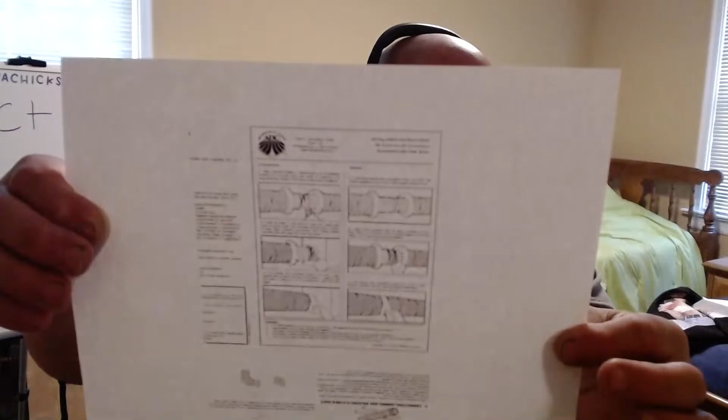I have seen videos of people talking about flex duct and how it's supposed to be installed, and I watched their videos and I'm just like, you got them half right, but not all the way right. So when you get a box of flex or a bag of flex or whatever, I know it's a little small print, but you see this little squared area right here? This comes with it, it's either printed on the box or it's on a piece of paper, and it tells you how to install flex.

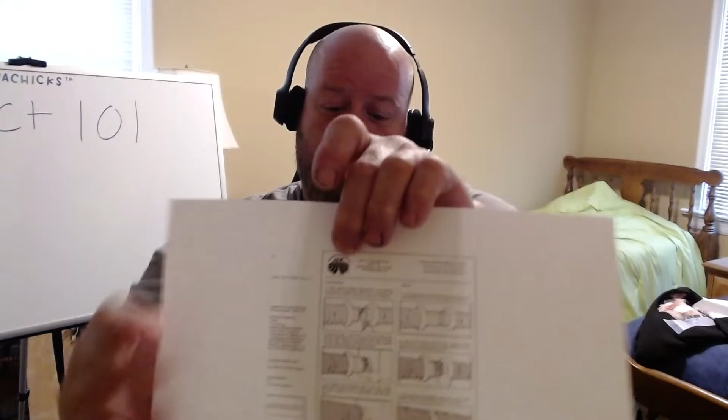Now, granted, this is a little small to read and we can't really read it that well, but I just wanted to show you. This comes with all flex. Now, you see this symbol right here? You see that symbol? That is the Air Diffusion Council. They manufacture, the manufacturers of flexible duct. This is who regulates that.

So on the Facebook page I posted a link, and that link is for this. It is for the Air Diffusion Council, manufacturers of flexible duct performance and installation standards, 5th edition. So we're going to go over this.

Everything about flex duct requirements, installation instructions, and how it's supposed to be done is regulated by this. Now, do people follow this? No, because they don't know about it. So that's what we're here for. We're going to teach you the Bible, and we're going to pull into the code sections of it and talk about it. So I'm going to reposition the camera, have it facing down so you can kind of see this, so I don't have to keep holding it up. You don't have to look at my beautiful face every day. So give me a second to reposition.

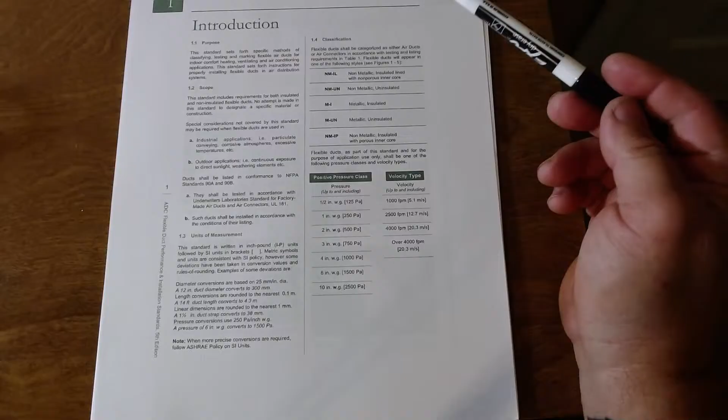Introduction. Purpose, measurements, classification. You have NM-IL, non-metallic insulated liner, non-porous inner core. NMUN, non-metallic uninsulated. M-I, metallic insulated, metallic uninsulated, and non-metallic insulated with porous inner core.

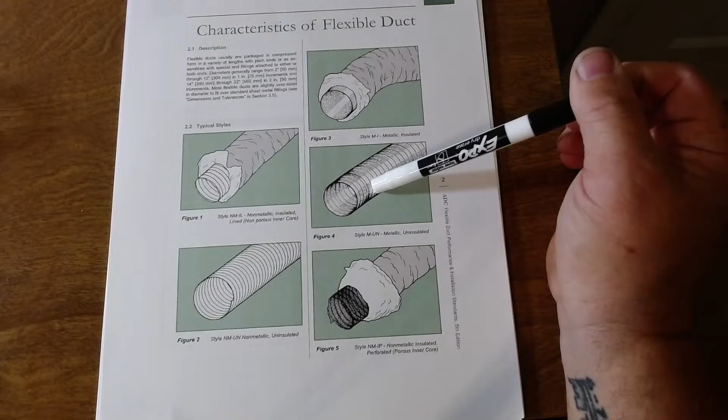Let's get to our characteristics. As you can see, this is your non-metallic insulated non-porous inner core. This is what we're talking about right here. We're not talking about the metallic insulated, we're not talking about the uninsulated, which is the air, the metal connectors.

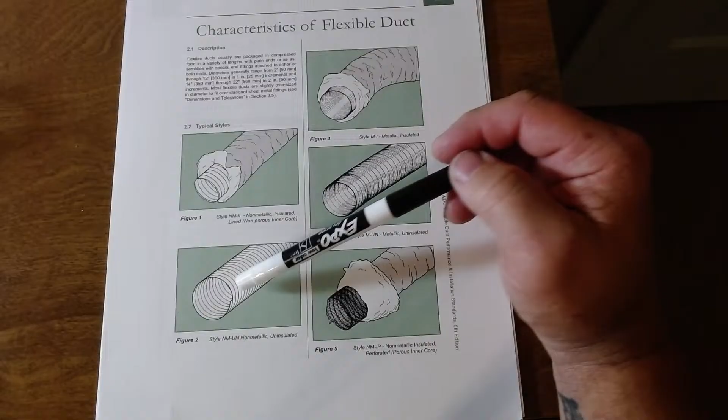We're not talking about the air connectors. Air connectors are uninsulated flex ducts, it's just the inner liner connection, or this lovely perforated porous liner. We're talking about this one right here, this is what everyone uses. Very rarely do we use the air connectors, which you can use in conditioned spaces, but this is what everyone was going with. This is what we're going to talk about.

Testing, listing, reporting, and certifying. So you can see it goes through that this stuff is tested and listed and certified. There's no 'oh, let's just do that.' Growth mold, air ducts, no. Air connectors, no. Hey, I got mold in my ductwork? Well, it says it's not supposed to be able to grow it right there.

So let me pull this over here and drop this down a little bit more so you can see that. There you go. So you can see, air ducts and air connectors. And now, here, right here, it collapsed. It has a footnote number 2.

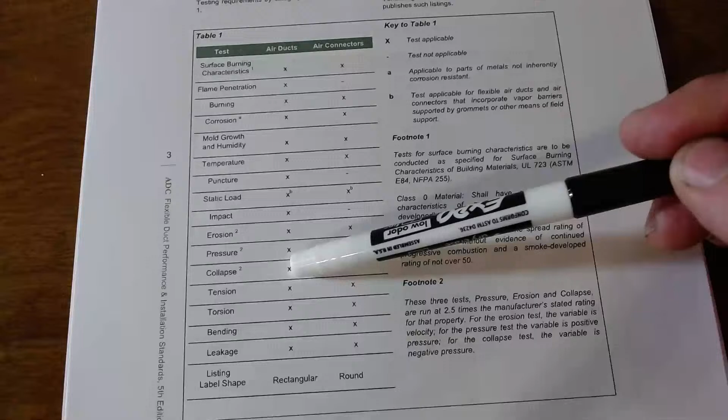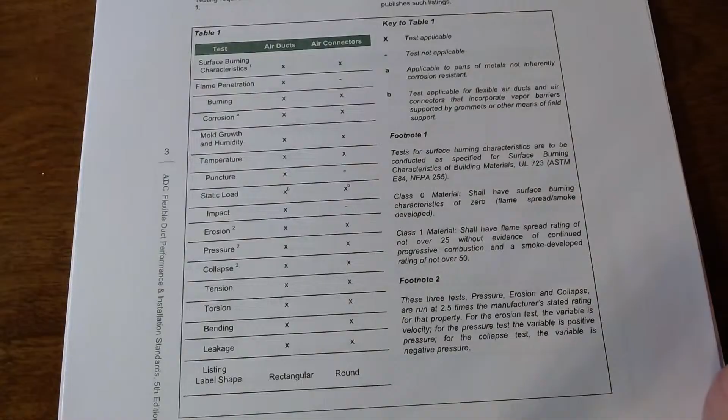That it won't collapse unless at the manufacturer's stated rating. Now, they will collapse as well if someone decides to lay on them. But yes.

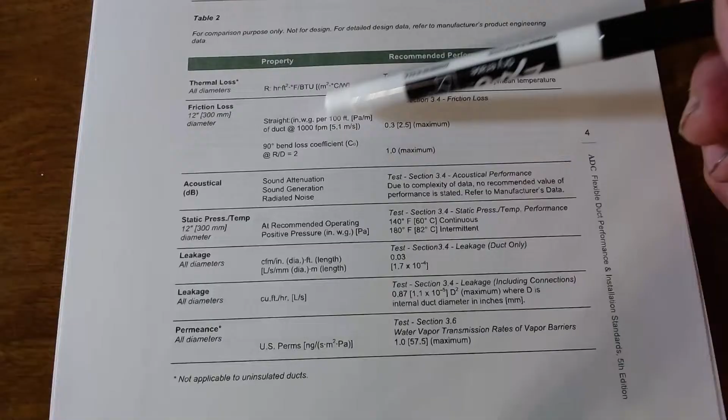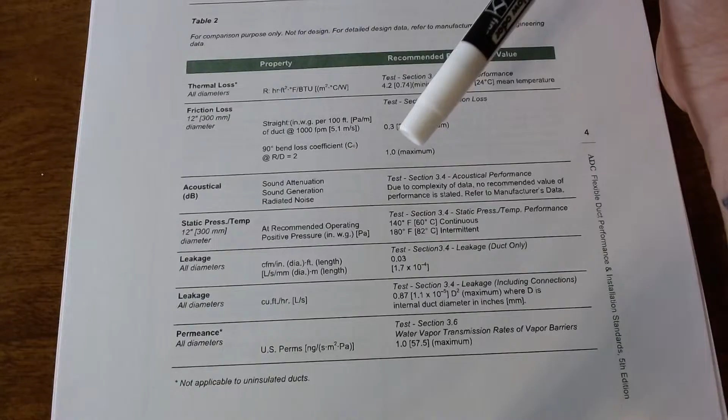Right here, friction loss. Okay, 12 inches, straight per 100 foot, at 100 and 1,000 feet per minute. 90-degree bend coefficient, loss coefficient. So it tells you the formula on how to tell you how much friction loss. But you're going to lose some friction with the flex duct, you're not going to have the same as you would with metal.

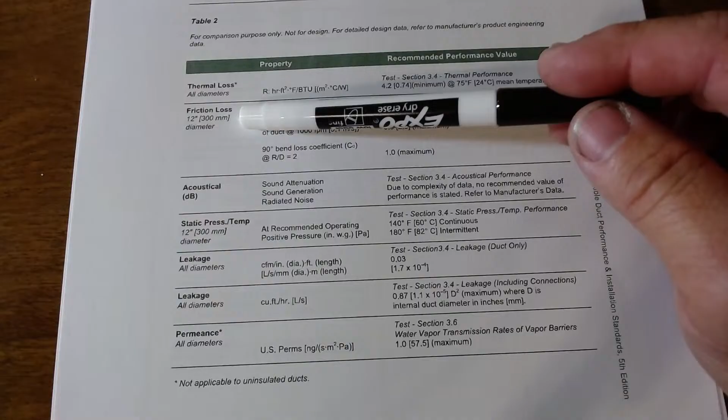You have static pressure, leakage, permeance, all diameters, performance, but friction loss is one of the keys that we have to worry about. All right, and you're more than welcome, like I said, download this, it's on the thing, and go from there.

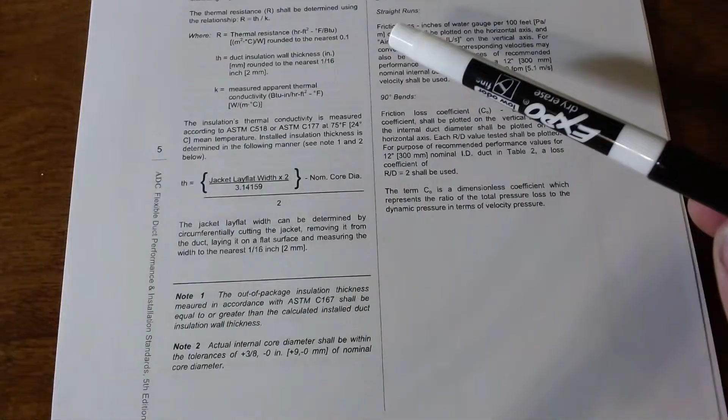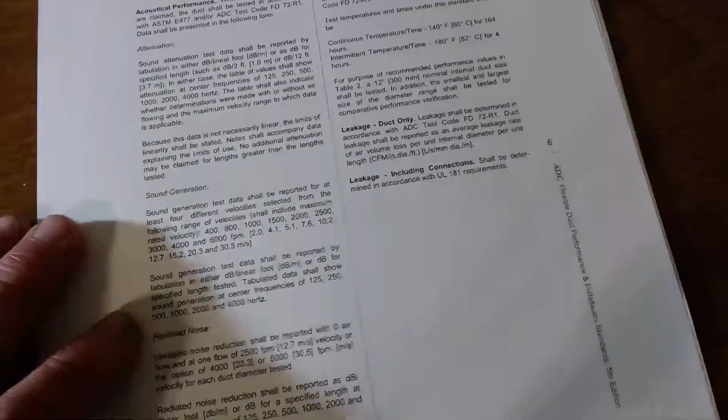More testing, thermal performance. As you can see, lots of formulas, which we're not really too worried about. This right here, more testing and certification. Acoustical performance, right here.

Material characteristics, methods of testing. So it talks about how they test it. And then once again, Air Diffusion Council, Air Diffusion Council, seal of certification.

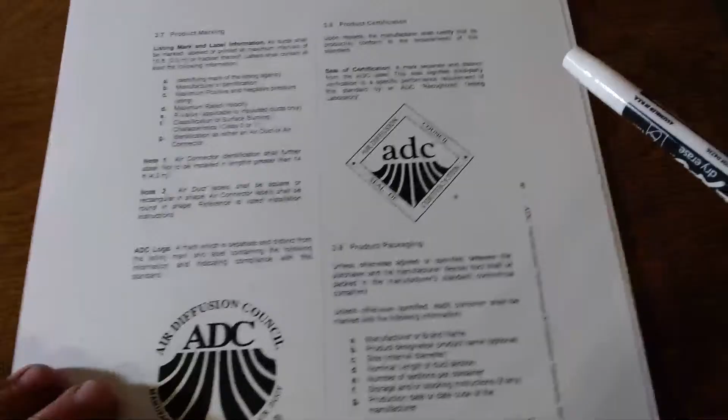Installation requirements. Code references, the authority having jurisdiction. That right there, that is. So I live in Virginia, you live in a different state, that is. So you have your state codes, then you have your authority having jurisdiction. Like the county I live in can either pass or fail certain things that other counties won't pass or fail. Each area is a jurisdiction, and that authority, that building official for that area has the authority. They are the authority having jurisdiction.

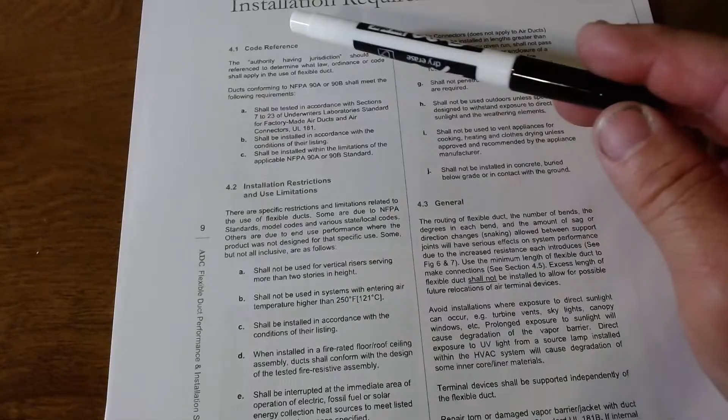Now, Virginia State has its own residential code book, where there is the International Residential Code book. So we take off the International Residential Code book, write our own Virginia Code book, and then each locality can pick and choose what they want to enforce out of that, but it's in the code book.

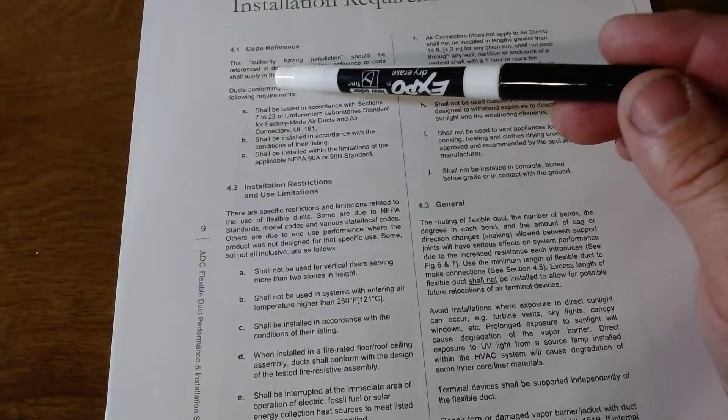Ducts conforming to NFPA 90A or 90B shall follow these requirements. And it talks about right here, shall be tested to sections 7 through 23, Underwriters Laboratory UL standards for factory made air ducts conforms to UL 181. Okay, remember that number, UL 181, that is key.

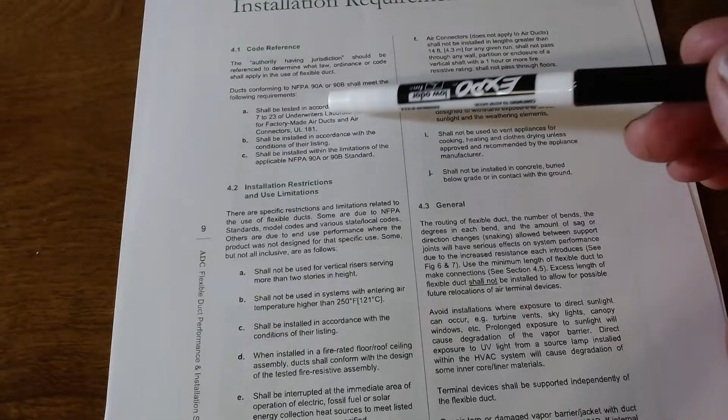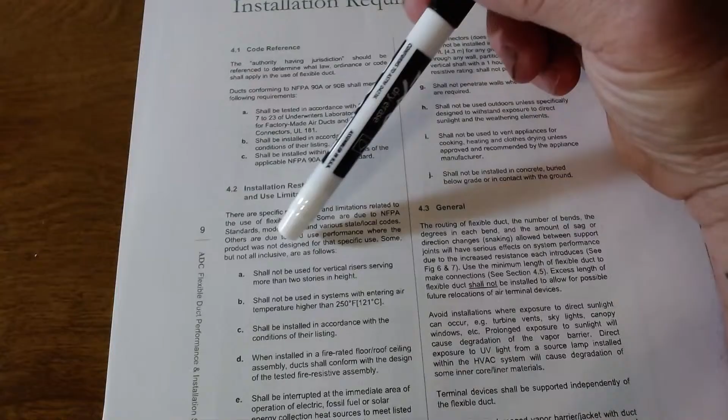Installation requirement limitations. There is some. These are specific restrictions and limitations related to the use of flexible air ducts. Some are due to NFPA standards, model codes, and various state and local codes. Others have to do with performance, where products are not designed to be used for a specific use, some but not all inclusive as follows: shall not be used as vertical risers serving more than 2 stories in height.

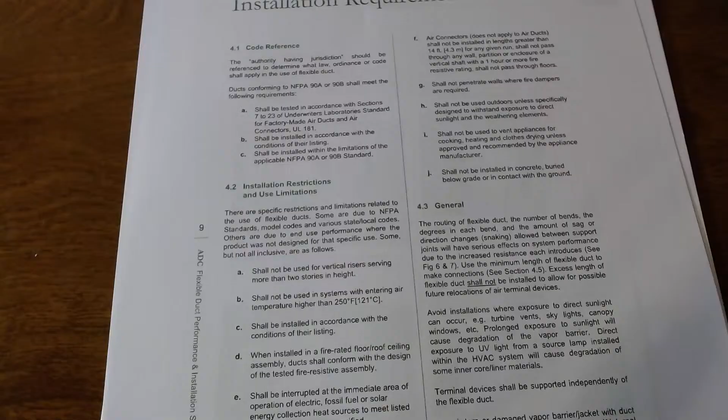Should not be used in a system with entering air temperatures higher than 250 degrees. Shall be installed in accordance with the conditions of their listing. When installed in fire rated floor, roof, or ceiling assemblies, ducts shall conform with the design of the tested fire rated resistive assembly.

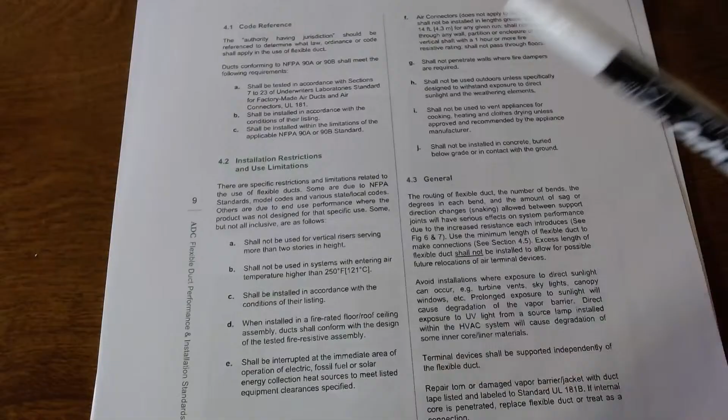Shall be interrupted at immediate area of operation of electric, fossil fuel, or solar energy collecting heat sources listed equipment. Listed equipment clearance specified, air connectors do not apply. Air connectors does not apply to air ducts. Shall not be installed in lengths greater than 14 feet for any given run, shall not pass through any wall, partition, or enclosure of a vertical shaft with a 1-hour or more fire resistance rating. Shall not pass through floors.

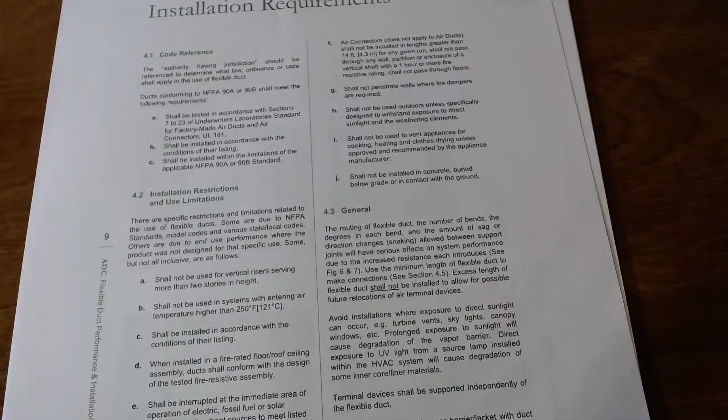So air connectors, the uninsulated flex duct, this right here, 14 feet. That doesn't mean you can go 14 feet, metal pipe, 14 feet, metal pipe, connector, and keep going. That's not how that works.

Shall not penetrate walls where fire dampers are required. Shall not be used outdoors unless specifically designed to withstand exposures to direct sunlight and weather elements. Shall not be used to vent appliances for cooking, heating, clothes, dryers unless approved and recommended by the appliance manufacturer. Shall not be installed in concrete, buried below grade, or in contact with the ground. I know that bottom one right there, letter J, we see a lot of flex on the ground, y'all.

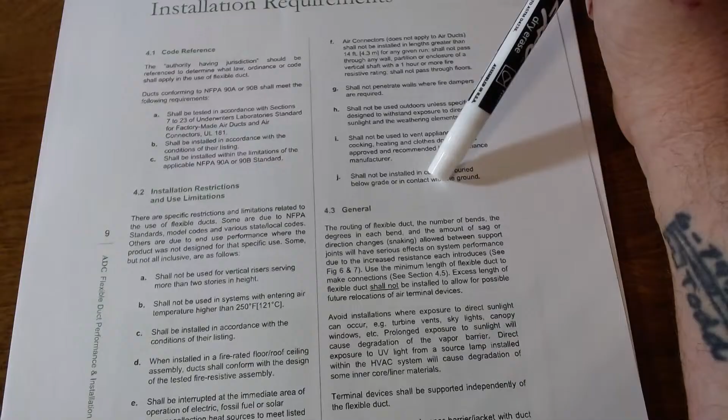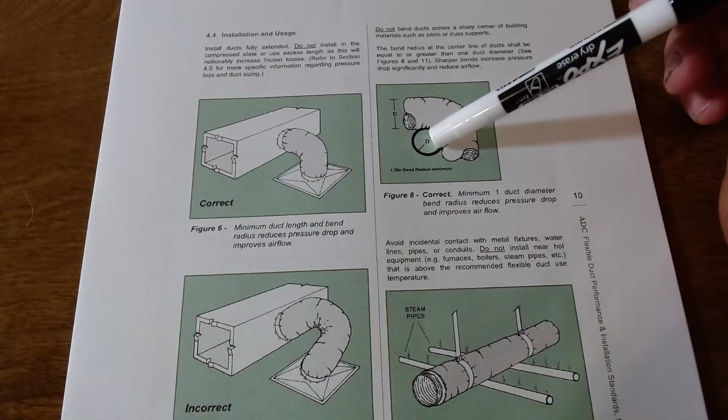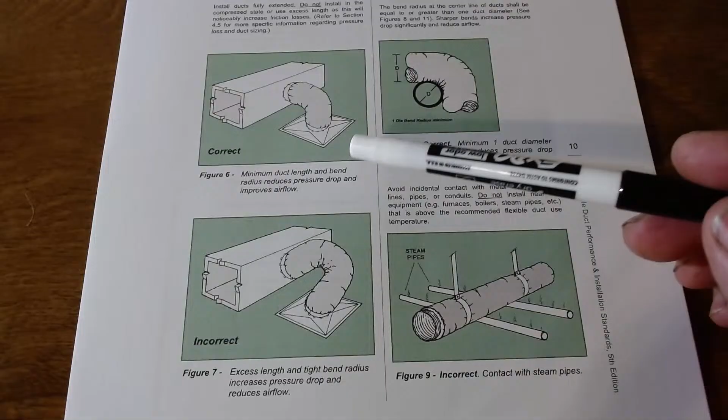Incorrect. Let's just put 5 feet on a 2-foot section and have that excess. Excessive length and tight bend radius increases pressure drop and reduces airflow. Minimum length, duct length, and bend radius reduces pressure drop and improves airflow. So you can see correct and incorrect. They give you this stuff, guys. It's basic.

Avoid incidental contact with metal fixtures, water lines, pipes, and everything else. Steam pipes. So you don't want it going over top of steam pipes.

Hey, Johnny. Hey, Jen.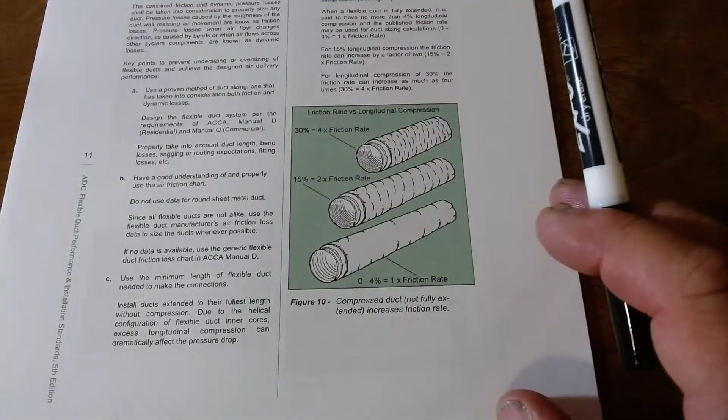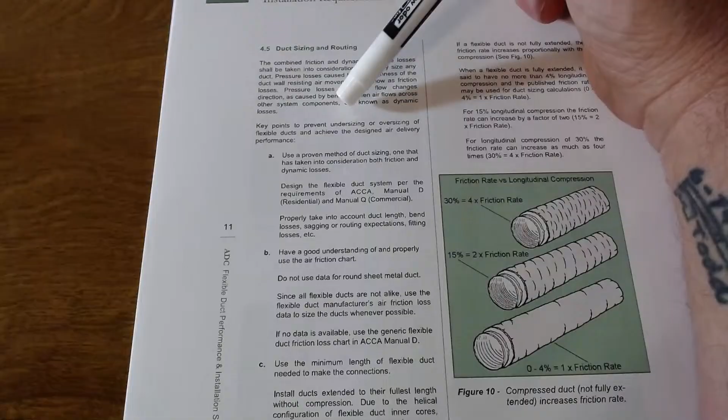Duct size and routing. The combined friction and dynamic pressure loss shall be taken into consideration to the proper sizing of any duct. Pressure loss caused by the roughness of the duct wall resisting air movement is known as friction loss. Pressure loss when airflow changes direction, as caused by bends or when flow crosses other system components, are known as dynamic losses. Key points to prevent undersizing or oversizing of flexible ducts and achieve the design air delivery performance.

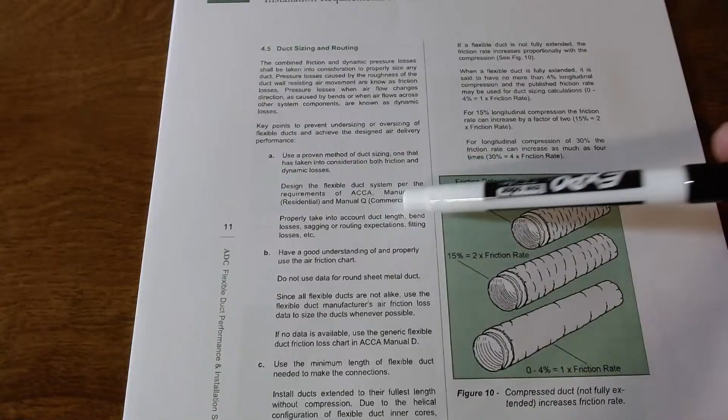So you can go right here in the second paragraph: design the flexible duct system per the requirements of ACCA Manual D residential and Manual Q commercial. Look right there, the very first thing we talked about in the beginning, ACCA and SMACNA. There it is again. And if you go down here to letter B, if no data is available, use the generic flexible duct friction loss chart in ACCA Manual D. Again, we are referencing Manual D for a reason in this because it's part of this.

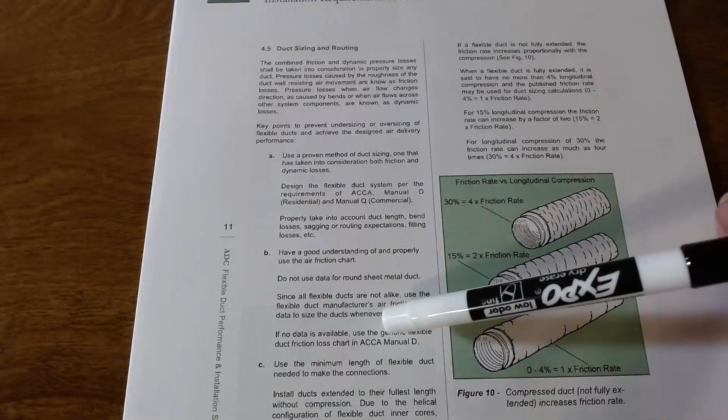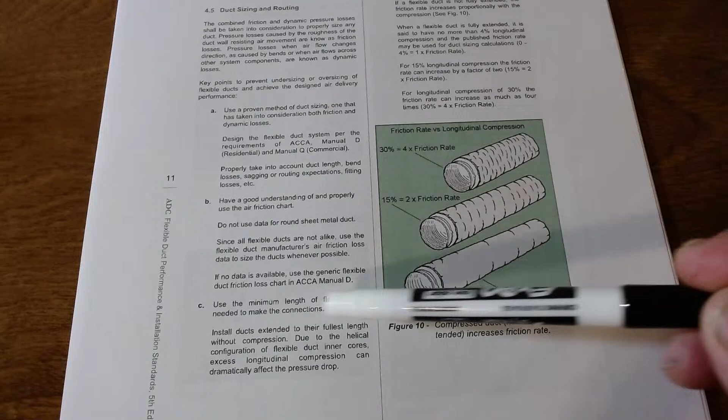Use minimum length of flexible duct needed to make connections. All right, letter C, we're going to go through. Install ducts extended to their fullest length without compression, due to the helical configuration of the flexible duct inner cores. Excess longitudinal compression can dramatically affect the pressure drop.

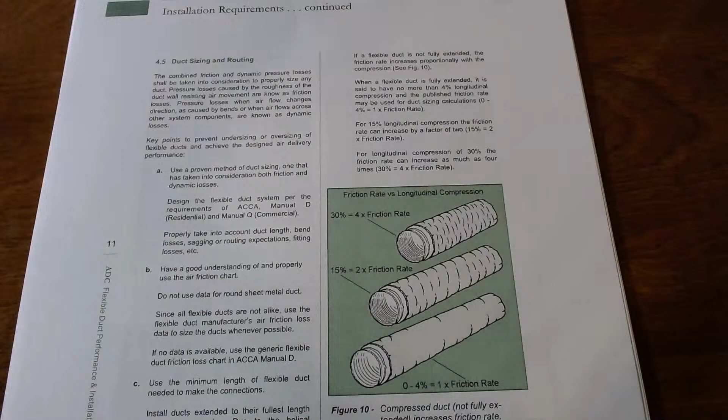I just want to add, again, this is from the Air Diffusion Council, the latest edition.

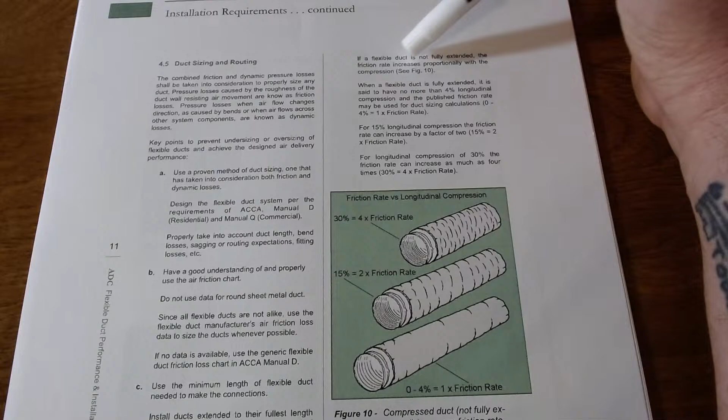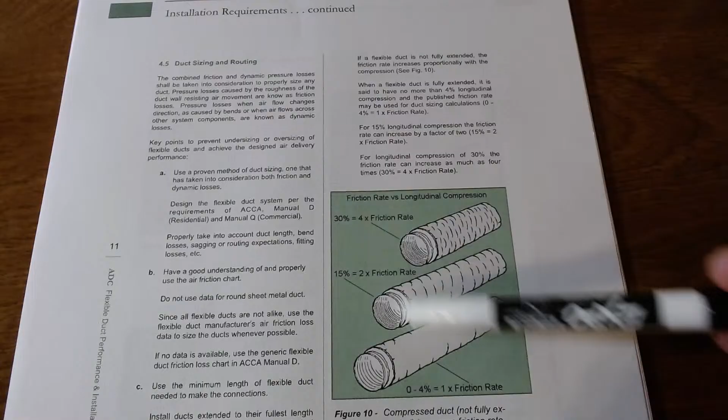Hey, Tom. All right, let's go back up here. If flexible duct is not fully extended, the friction rate increases proportionally with the compression. See figure 10. So you can see figure 10. Here is your fully extended, semi, and compressed, so you can see your friction rates. When flexible duct is fully extended, it is said to have no more than a 4% longitudinal compression, and the published friction rate may be used for duct sizing calculations.

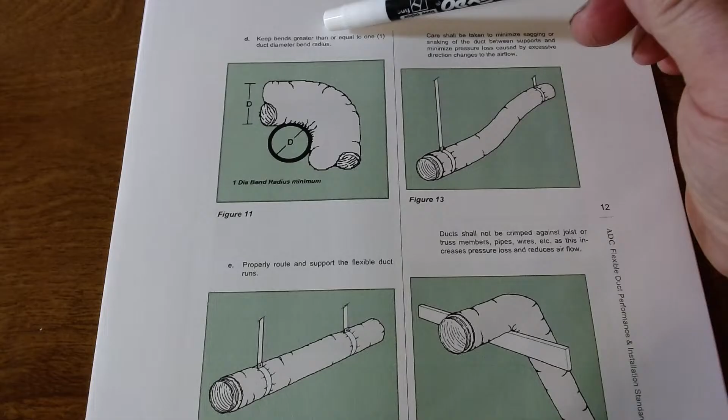So you can see here. All right. Keep the bends greater than or equal to 1 duct diameter of bend radius. So if you have a 6-inch, you don't want less than a 6-inch bend here. Okay.

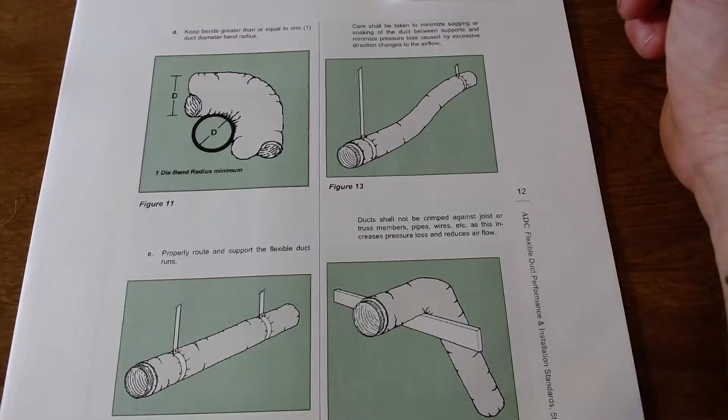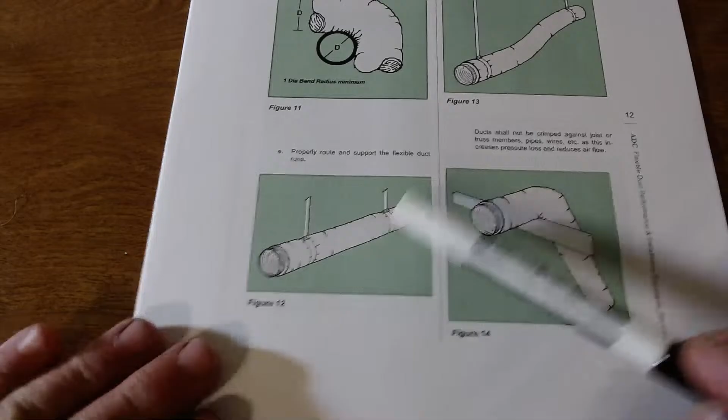Support. See how we have that? Care shall be taken to minimize sagging, and supports to minimize pressure loss and excessive directional changes of the airflow. So you don't want more than a 1/2-inch sag in your duct. You want to keep it as straight as possible. All right, you do not want to just sag your flex over a rafter to make a 90.

You want to cradle it. You want to swoop it. You want to take the most direct route. If you can go underneath there and kind of just 45 it and straight round to it, that's what you want to do. You don't want to create this, because this was actually kinking it. Let's see here.

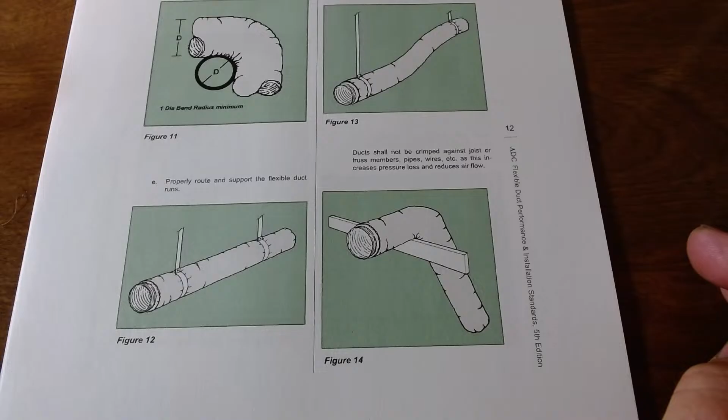So you can see a 90-degree bend has a pressure drop equal to approximately 20 linear feet of flexible air duct. So each 90-degree bend, you add 20 equivalent feet of length used for calculation sizing. So you want to do as little as possible.

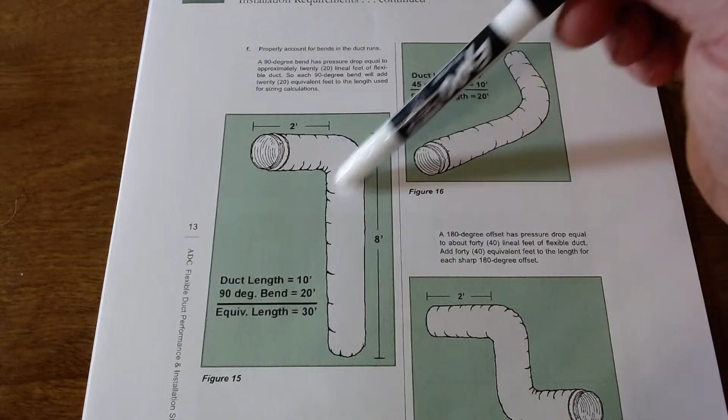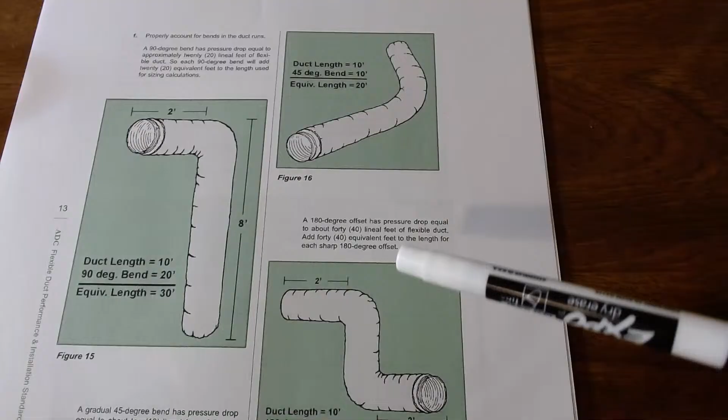All right, 45. A gradual 45 bend has a pressure drop equal to about 10 feet of linear flexible duct. So if we have a 45, duct length 10 foot, 45 is 10, so 20. So duct length of 10, 180 offset equals 40, so that's now 50. So you can see how changing this and not taking the most direct route creates a restriction of your air. It causes issues.

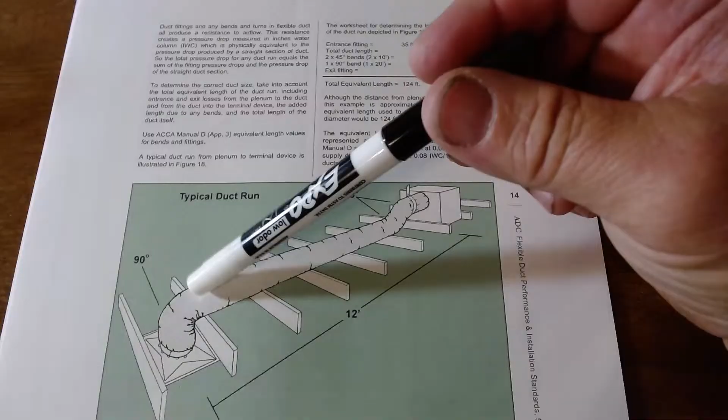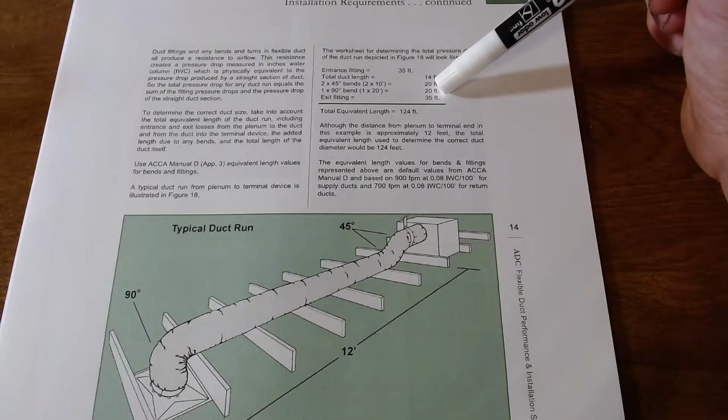And if you add 2 45s, so we'll go right here to the math they have listed. Total duct length, 14 feet. Two 45s at 10, that's 20 feet. One 90, 20 feet, and exit fitting 35 feet. So a whole of 124 feet.

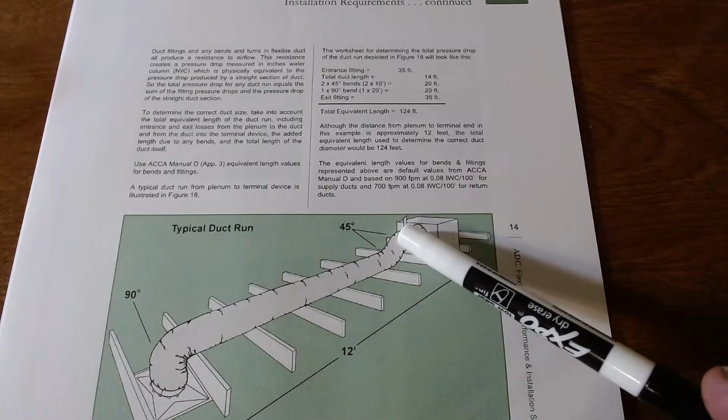I would say put a hard 90 right here of an elbow and then have a straight flex run. And then suspend it, and as you go over this way, strap it up to raise it to create a gradual drop versus the double 45s.

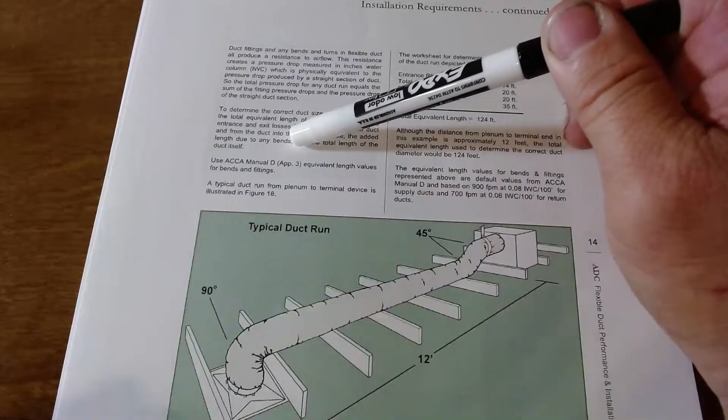And you can see this is all - use ACCA Manual D. Again, it's all there. And Tom, I put this - I'm going to go back to here. I put the link to this on the post about class today, so you can go in and download this if you need to.

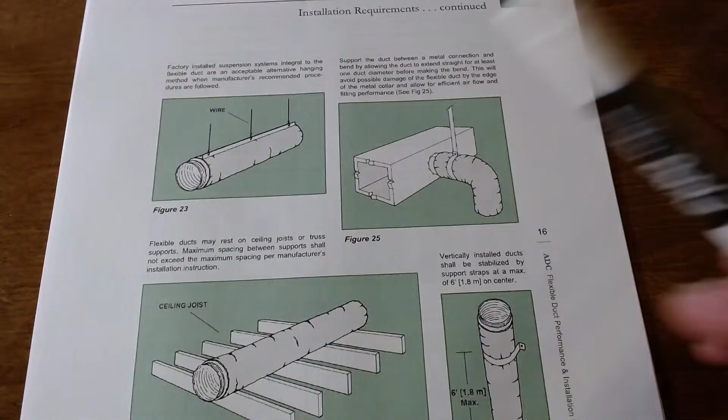You can install factory wire supports to support it there - ceiling joists, strapping, vertical, max 6 feet. Support air duct between a metal connection and a bend, allowing the duct to extend straight for at least 1 duct diameter before making the bend. This will avoid possible damage to the flexible duct by the edges of the metal collar, for efficient airflow and fitting performance.

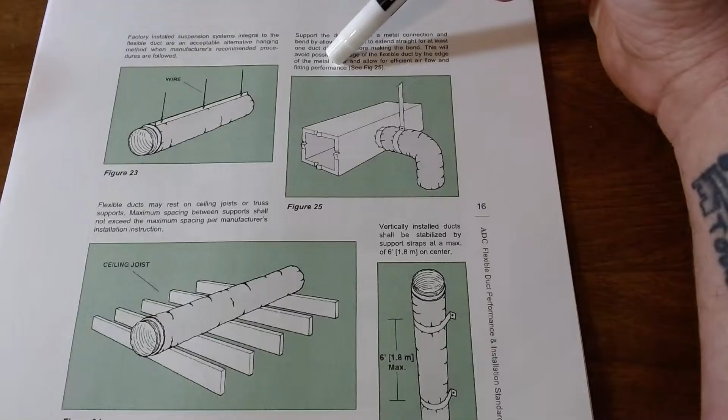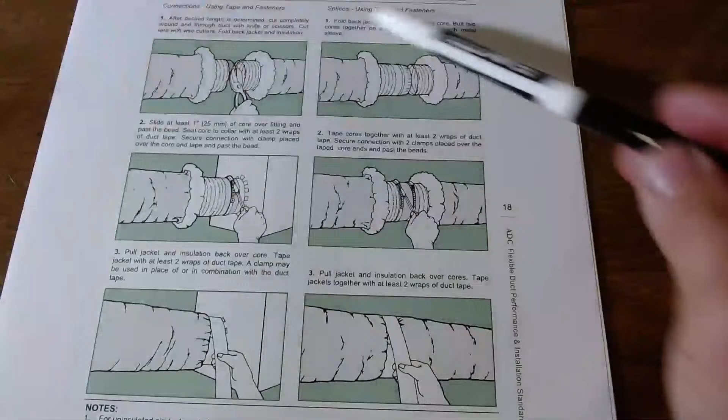Gotcha, now to the bread and butter. So remember in the beginning everybody, I showed you this right here that comes with every box of flex or bag of flex. This little piece of paper right here talks about how it's done. Here it is in a bigger picture. We're going to go over this step by step because there are some misunderstandings of this, and I want to make sure everyone understands.

After you get your length fit, slide at least 1 inch of the core over the fitting and past the bead. Seal the collar with at least 2 wraps - I'll rephrase, at least 2 wraps of duct tape to secure it.

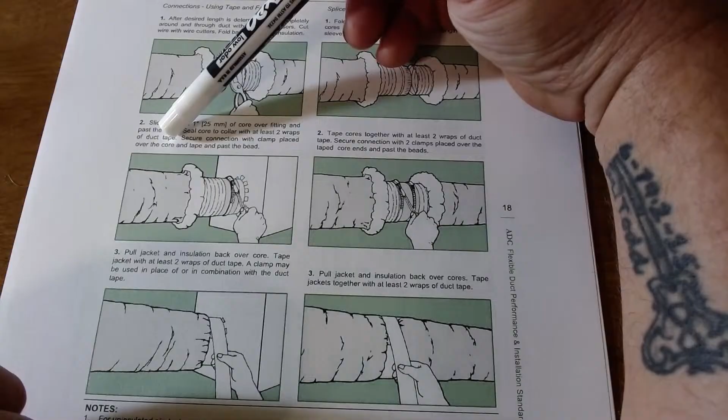Now before you say duct tape - oh no. Notes: use tapes listed and labeled in accordance with standard UL 181B and marked 181B-FX. It's right here at the bottom, it tells you that. Just because it says duct tape up here doesn't mean they're not talking about the 181 tape, so get that out of your head.

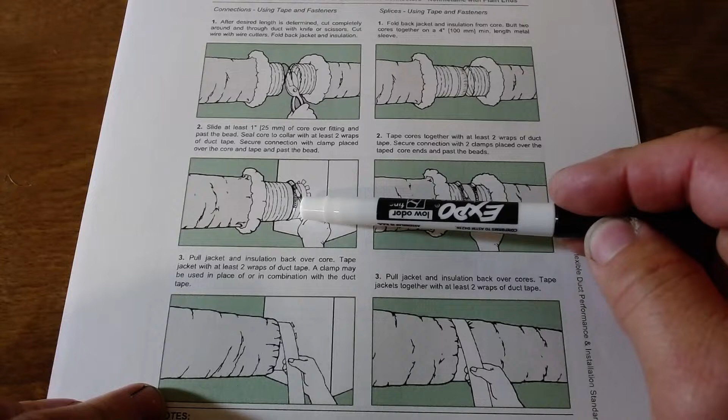Secure the connection with the clamp placed over the core and tape, past the bead. So you can see right here in this picture, they have the tape and they have the strap over top of the tape. The reason for this is the vibrations of any airflow going through there. When you just have the Panduit strap, or if you want to use the metal hose clamps there, the vibration can rip the flex at that connection. The tape is to give the Panduit strap the ability to not rip the flex and cause it to break.

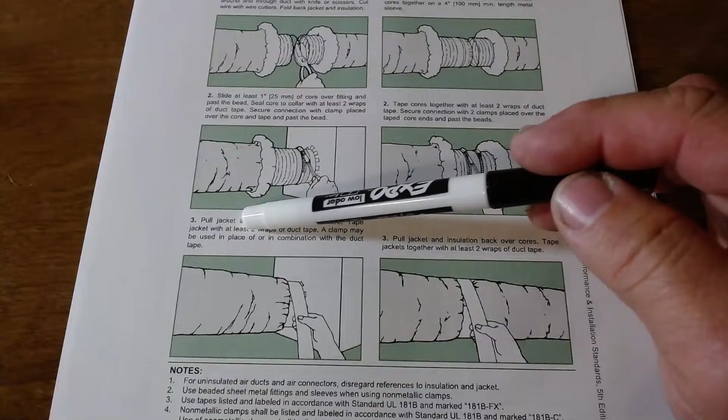Pull the jacket and insulation back over the core tape. Tape the jacket at least 2 wraps of tape. A clamp may be used in place of or in combination with duct tape. So technically right here, number 3 - oops, shoot, didn't mean to kick the camera.

Number 3, you don't have to use a strap, or you can use a strap. It has either or. Can be used in combination with duct tape. All right.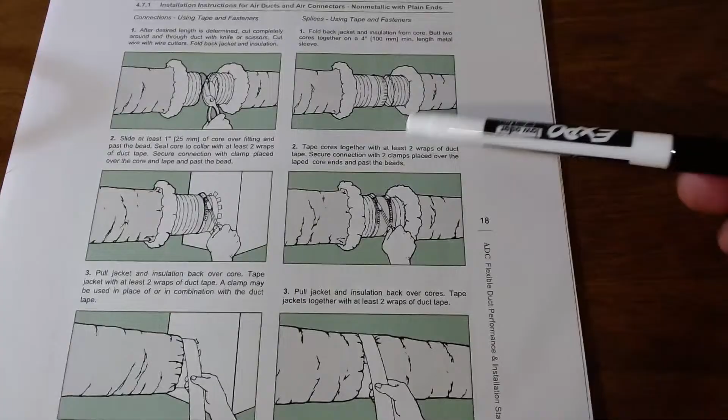Right there, if you are making a junction, you need a piece of metal duct to make a junction. It tells you right here, a 4-inch metal length sleeve right across the top. Boom, metal sleeve. This does not mean take the one flex duct and shove the other one in it and tape it up. That is not a metal sleeve. They want a metal sleeve when you put that in there. Now make sure you notate where the metal sleeve is, as you can see with the tape, and you put a strap around that and use that as a support, because if what happens, all the weight's right here, it will cause a sag in your ductwork.

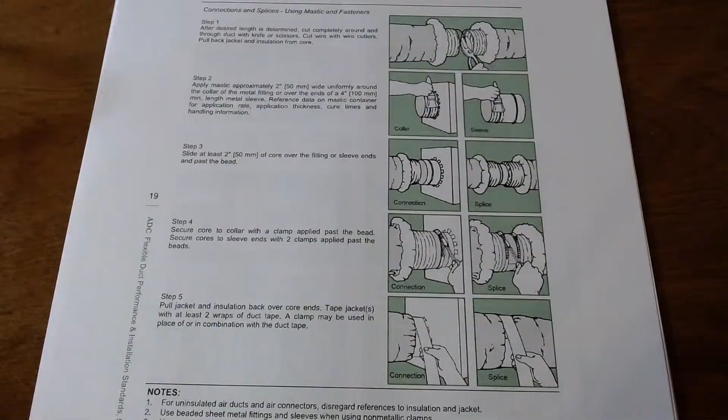Oh look, making connections to collars, essentially. Guess what? It's the same thing. Now, there is a second way to do it.

Step 2, apply mastic approximately 2 inches wide uniformly around the collar of the metal fitting or over the ends of a 4-inch metal sleeve. Reference data mastic container application rate, and we'll go down here in the bottom for that in a second. So you can put mastic on the collar.

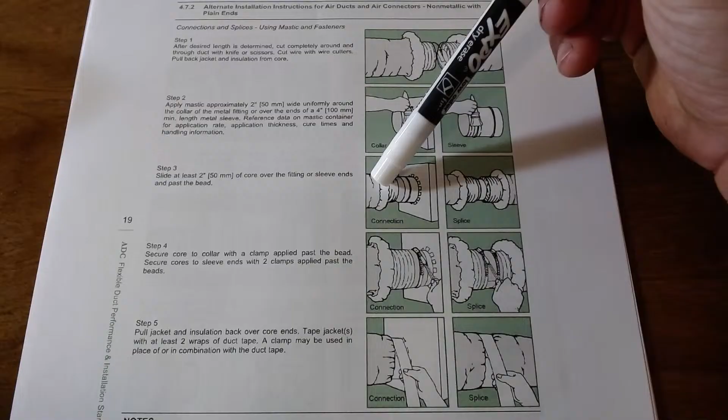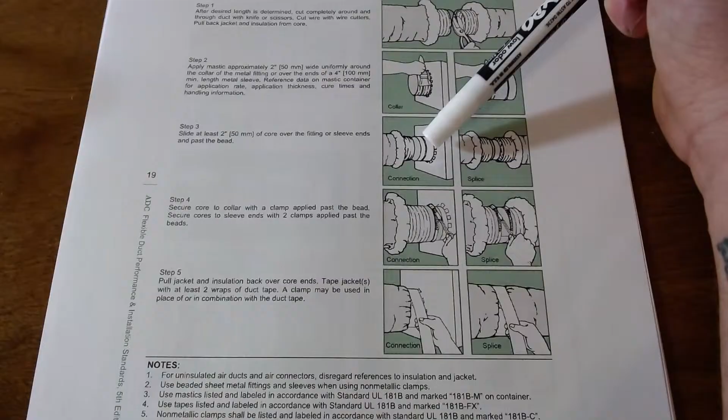Put your flex duct over top. Slide at least 2 inches of core past the bead. Secure the core to the collar with a clamp applied just past the bead. Secure the sleeve ends with 2 clamps past the beads. So again, you want to put your strap in the mastic area, because that is where they're wanting their strap. And it says right here,

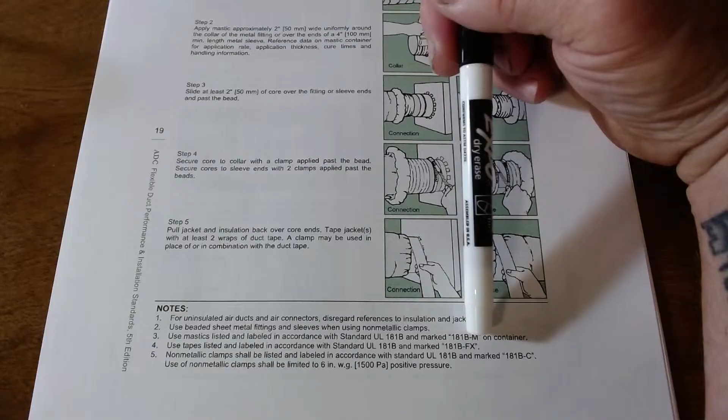Use mastics listed and labeled in accordance with standards UL 181B and marked 181 B-M on the container. Oh look, a specific mastic, not just any mastic, a specific mastic with the labels, with the UL listings. So yes, you can use mastic on the collar. You can just use a duct tape and Panduit strap. Remember, 2 wraps of tape and a 2-inch bead.

All right, approximately 2 inches right there.

So you go through here, you can see it's the same thing we're talking about: mastics, tapes, everything. Collar, sleeve, connection, splice, mastic, and tape. Again, at the very bottom of this, it talks about 181 all across the bottom again. It's not hard to do this, but I guarantee you, everyone takes this piece of paper and throws it out.

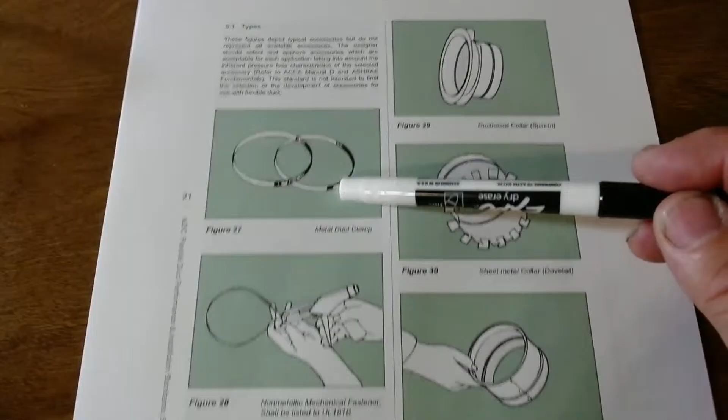Metal clamps, non-metallic, aka Panduit straps. You have ductboard collar, sheet metal tab collar, metal collar, spin and straight. So you have different types of collars. We all should know, you have reducing collars. You have a ductboard tabbed collar. You can see we have all different types of places to connect. You can see they give you space to make these connections.

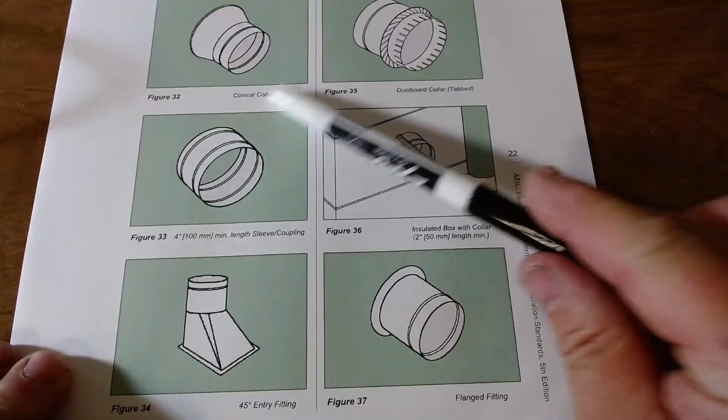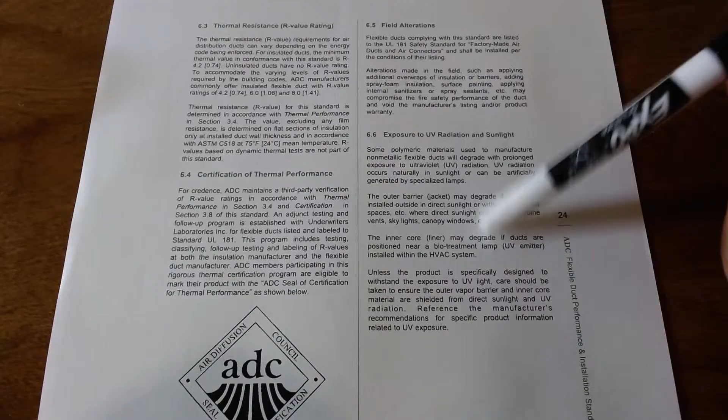So again, Flexible Duct Performance and Installation Standards, 5th edition by the Air Diffusion Council. You can't get much more direct information than from them. Okay.

Yes, Tom, mastic, mastic, mastic. But a lot of people don't understand how to use it properly. And a lot of people don't understand how to install flex properly. So that's why we're having this little tidbit here, 'cause I've seen lots of videos of people installing flex duct and they're installing it incorrectly.

So let me move this like this here. All right, so I know we got some shadowing going on. I'm trying to eliminate some of that shadowing. Hopefully that helps.

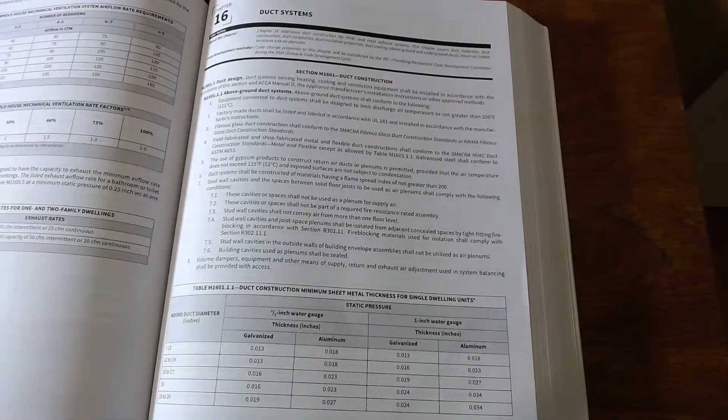Now, this is the 2024 International Residential Code Book. My area is not in it. Some areas are still behind as well, they're using the 21 and some of you still use 19. But I want you to see this right here. Residential code, let's see if I can get this to M1601.1 duct design. Duct systems serving heating, cooling, and ventilation equipment shall be installed in accordance with provisions of this section and ACCA Manual D and appliance manufacturer's installation instructions other than or other approved methods. Basic right here, duct design, the very first thing, ACCA Manual D.

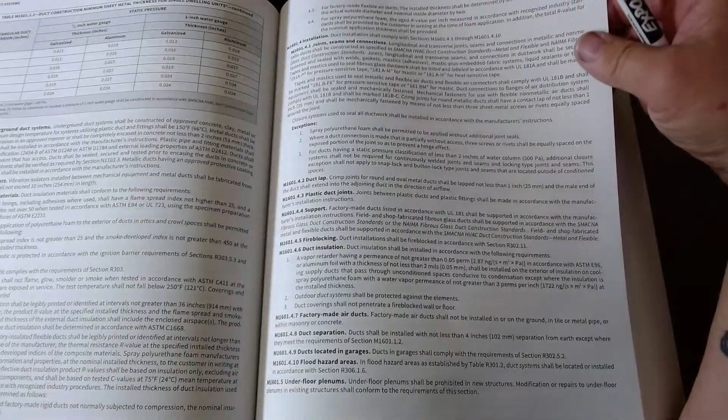So you can see there's a lot of information in here. Above ground duct systems, duct materials, joints, fire blocking, factory made air ducts, flex ducts shall not be installed in or on the ground in tile or metal pipe or they meet the requirements for M1601.1.2. Oh, excuse me, within concrete. Separation.

General materials, furnace controls. And here's one I love that people don't understand.

Independent garage systems. Furnaces and air handlers that supply air to living spaces shall not supply air to or return air from a garage. So if you have a system in the garage that provides air to the house and you decide, hey, let's put a return and supply in there to my garage, that is the code you're violating right there.

M1601.6. I'm going to flip the camera back around, so give me a second here.

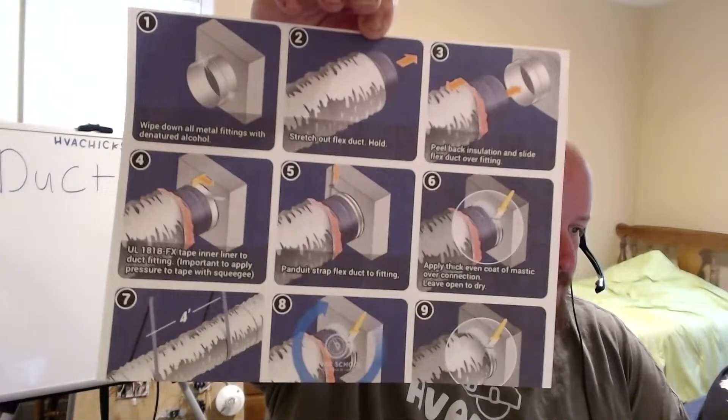I printed off a colorful one, but there are things you can find on the internet on how to install flex duct, step-by-step instructions. If you're not sure, look it up. I found if you type in flex installation instructions, you will get a plethora of things.

Of course, my camera wants to not focus again. There we go. So yes, if you're not sure, look it up. This is just a basic thing.

Like I said, I've seen a lot of videos out there of people just putting the tape at the seam and then putting the Panduit strap above the tape and not on the tape. I've seen them put the mastic, like a little bit, they'll put the flex on there, Panduit strap, and then put mastic around it. That's not how it's supposed to go.

Tape on the collar, your flex over top of it, Panduit strap over top of the flex, and the mastic that bonds it.

Now I know, you don't want flex inside the air duct. It's going to create mold and issues and everything. If you're using the correct stuff, it should not. That's why the instructions say certain rating mastics and UL 181 tape. Make sure you're using the proper tape.

If an inspector comes by and pulls back and doesn't see that 181 tape, guess what? They're going to fail you. It's just there, y'all. It's in black and white right here. And installation instructions, it's there for a reason to make sure you're doing the job properly.